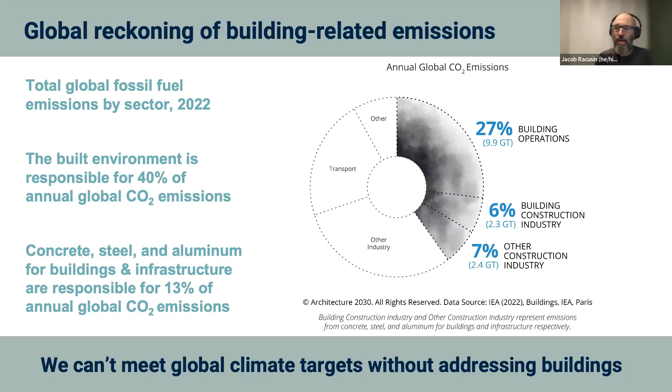I want to highlight, there is so much we could talk about just on the operational side of things, and I'll talk about that a bit in broader context. But I'm really going to be focusing primarily on embodied carbon in general, and specifically material carbon emissions. If we're looking between building and infrastructure, concrete, steel, and aluminum alone are responsible for 13% of global emissions. Highlighting those three materials within the context of how our buildings are produced, that's a huge volume of emissions that we've got agency in addressing through our design practices. So that's what we're going to be honing in on for the course of this conversation.

Just to put operational efficiency in context for climate action, I come from an energy background, energy modeling, energy management background. For many years, it was all about energy efficiency and reducing energy intensity of our buildings as the primary mechanism for addressing climate change. I want to start by saying, absolutely critical, still very true, and all of the efforts we do to draw down the energy loads of our buildings are fundamentally important towards hitting climate action goals for our industry. Unfortunately, they're insufficient alone. We need to do more than just make our buildings more efficient. Necessary but insufficient would be the way I would describe that.

Just to give a little context, Builders for Climate Action, in addition to developing the BEAM tool, does a lot of research on topics of material carbon emissions, and we've been involved in a whole series of benchmarking studies in various municipalities. So I know you're not all necessarily working in low-rise residential, but it presents some really good simplified case studies. We're going to give some data points to quantify and scale the impacts of emissions, just to put the embodied carbon, the material carbon emissions, in context of why this is important and how this can get woven into your practice.

So looking at an average two-story home, we see that every year it's releasing close to 3 tons of emissions. Over the course of time, those emissions on an annual basis continue to add up as we dramatically increase efficiency and reduce the operational loads. That has the effect, in many cases, of reducing the carbon emissions from the operation of this building.

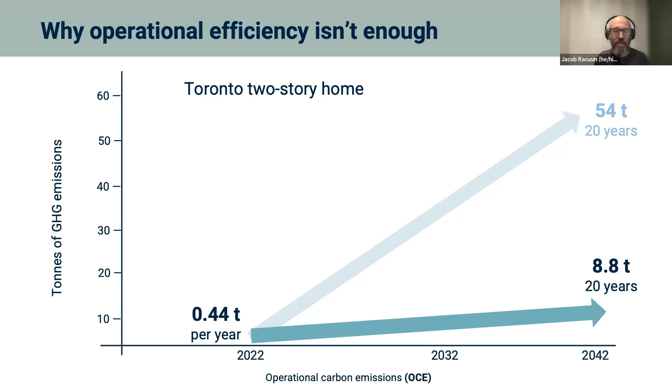So we see that line being much lower—there's much less added to the atmosphere on an annual basis for a much more efficient building. But we don't necessarily know the real climate impact of that build if we're only starting at operation and not looking at the upfront emissions from materials and construction practice to get that building into form in the first place. Whereas those previous graphs were showing lines starting at a zero mark, that's actually not accurate. They're starting with some carbon footprint entering into the life cycle, and that's the other part of the equation.

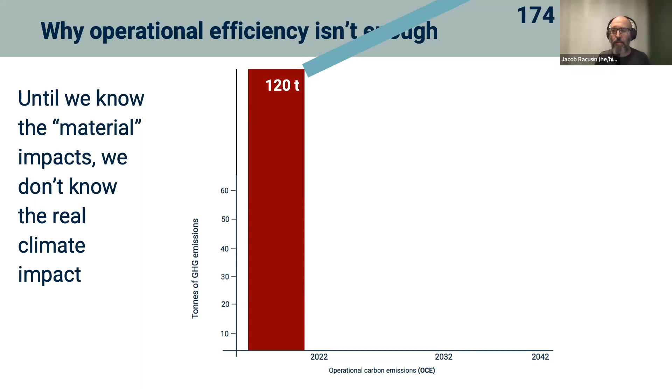Looking at results from benchmarking work we've done on existing, as-built buildings—this isn't hypothetical—the worst case scenario of some carbon intensive buildings radically dwarfs the operational profile of a really low load building. And when you couple that with an inefficient build, we have blown our carbon budget radically.

Average upfront material emission profiles start us at about 50 tons, and then there's an average incremental operational load into the future on top of that. It's really not until we combine low load, high performance operational buildings with low embodied carbon construction practices that we can actually get towards real net zero construction and net zero buildings—meaning net zero carbon and decarbonizing the building industry.

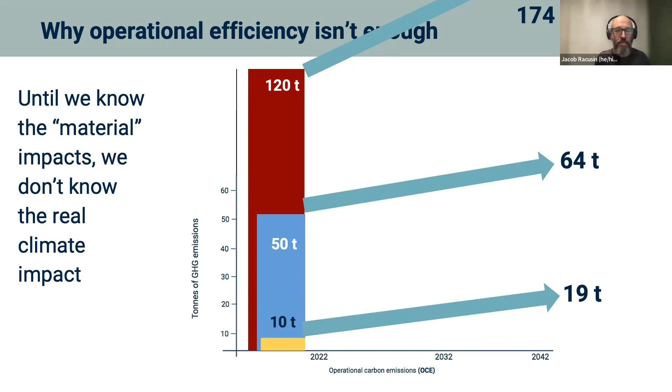Until we really understand the material side of things, we don't actually know the full carbon impact of our projects and whether we're going to hit our decarbonization goals for our industry by the middle of the century. Looking at that another way, with a different data set, but the same sort of blending of operational and embodied emissions.

When we look at various combinations of higher embodied carbon with lower operational, or vice versa—these mixed conditions in the middle—we see they're kind of hovering on either side of average. It's really not until we're reducing our impact in both of those categories that we actually get towards a true low carbon build.

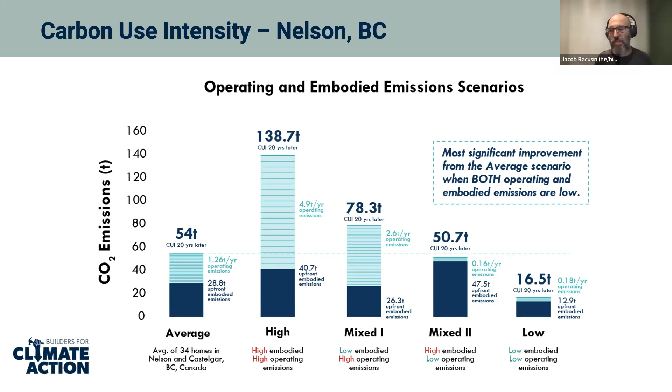That's really the fundamental justification as to why we have to expand our field of accounting, our field of view, and recognize the impact we're having from the material selections we're making—to really be able to hit the carbon goals and go beyond just addressing energy efficiency as the only mechanism for addressing the climate impact of our work.

I'm a big fan of goal setting in projects and establishing really good goals and good metrics to achieve those good outcomes. I see in a lot of projects I work on, particularly as a consultant, that energy use intensity—the operational energy of a building—is what's used as the primary goal for addressing climate impact. And again, absolutely necessary, super, super important.

What we saw from these other graphs is you can't get a zero carbon building if you're not managing your energy loads really well. But it's just not enough to stop there—in addition to looking at energy intensity, that energy really does need to be converted into carbon emissions. That involves looking at the energy source emissions and what is providing that energy and its carbon impact.

As we're moving towards electrification, we're learning a lot more about how just looking at that on an annualized basis isn't enough—we actually need to look at the time of use of the emissions and the different emissions profiles that come from the peak loading on an electrical grid. So there's a whole lot there that needs to get unpacked, a little bit beyond the scope of what we have time to talk about today.

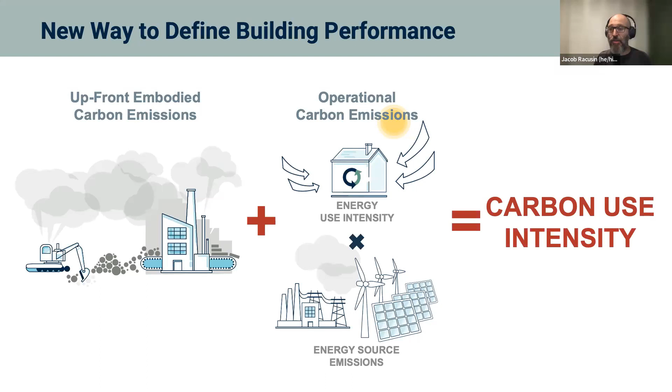But as we're setting goals and priorities for our projects, if the goal is really around climate impact, we shouldn't just set energy targets—we should set carbon targets, not only within the energy and operational side of the equation, but also adding upfront carbon emissions to get a metric, say, of carbon use intensity, if you were to blend those together, or at least recognize that both need to be held within the goals and metrics of success developed for a given project.

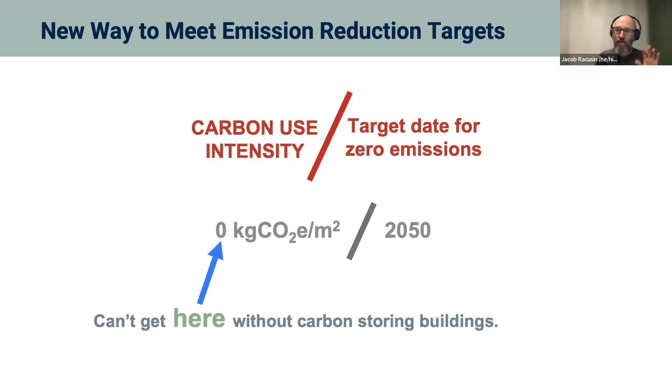Ultimately, what we're learning from the IPCC is that we need to get to zero carbon industry by the middle of the century. We have to address it across the life cycle of the building, and we're simply not going to get to zero unless we also hold and value the role of carbon storage within buildings, because we're still going to need glass and cement and concrete and other emission-related materials in our projects. So we have to find a way of balancing that equation to actually get to a zero point. We'll talk a little bit about carbon storage too. That's the bigger picture accounting I want to hold for us as we look at a more specific dive into the material carbon emission side of this equation.

I want to give a little bit of definitions and terminology and explain some of the letter jumbles you'll see on the screen. When I use carbon and carbon emissions, that's really shorthand for carbon dioxide equivalents. Those are the units we're measuring when talking about the global warming potential, or the contribution to climate change from the emissions of our materials and building operations. The little 'e' at the end of CO2 means it's not just looking at carbon dioxide, but blending all the different greenhouse gases and converting them to their equivalent value of impact as per a molecule of carbon dioxide.

An example of that would be methane. Methane is definitely released through the production of materials, as well as natural gas that may be used on site. Methane over a 100-year period has about 34 times the impact of a molecule of carbon dioxide. It's actually closer to 80 within a 20-year period. Nitrous oxide is significantly higher. We get into R410A and some of the refrigerants, and those can be thousands of times the impact. In the case of methane, the value would be 34 kilograms of CO2.

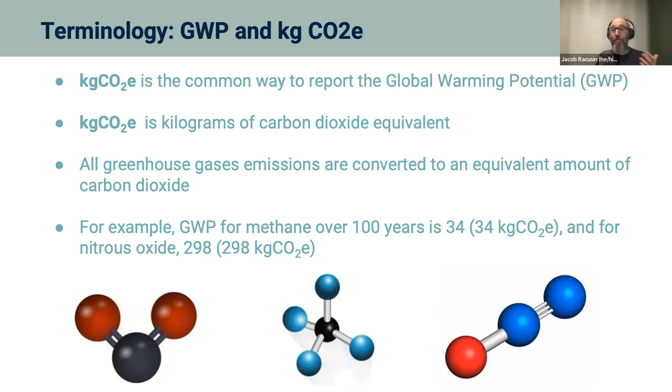Whenever you see that little 'e', it means we're talking about all the greenhouse gases contributing to climate impact. When I talk about carbon from the standpoint of carbon storage in a bio-based material, I'm literally talking about the element carbon in that material. When you see a carbon dioxide equivalent value from that, we've done the math to understand how much carbon dioxide has been photosynthesized out of the atmosphere and embodied into that material. So I'll try to be intentional with my language around carbon - sometimes I'm literally talking about carbon, sometimes carbon dioxide, and sometimes in the context of carbon emissions we're looking at CO2e for all the greenhouse gases.

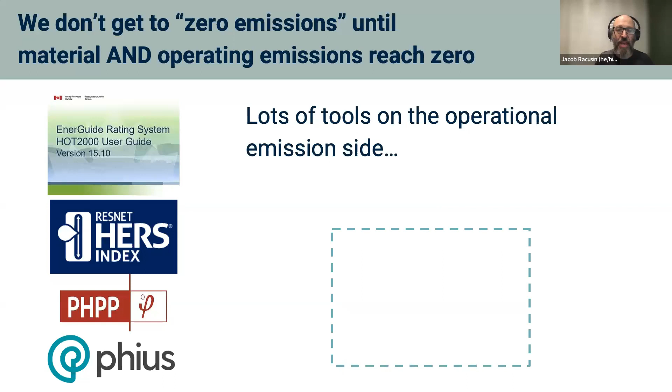Looking at this need to get to zero emissions across both the operational and material side of things, there are lots of really good tools, rating systems, and structures on the operational side, so I'm not going to talk about those - there's plenty of good resources for that. We developed BEAM to help address the material side of that, and there are other really good tools out there as well. I may draw up some references to those too, but the intention was to fill a hole in the tool sets to quantify and help manage the material emissions side of things.

To give a sense of scale as to why this felt really important to address, we looked at this from a global perspective at the beginning of the talk. We've done a lot of benchmarking of many homes and larger buildings, and in the context of homes we've recognized an average emission profile across our benchmarking studies of about 200 kilos per meter squared of building area. Multiply that by new low-rise residential construction - this was from 2017 numbers - and we get 50 million tons of annual emissions just from that one sector of the built environment. That's not even looking at more structurally intensive mid- and high-rise structures. That is equal to or greater than the entire national emissions of some major developed countries.

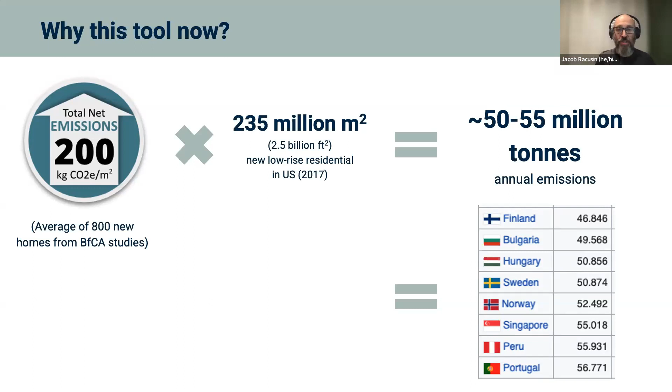So this is a really big deal. There's a lot of carbon, a lot of emissions that we have the opportunity to help manage and address - first by daylighting the accounting and scale of those emissions, and then using a tool, an analysis strategy, and a design process to help turn the dial on what materials we're selecting and how we can reduce that impact.

As I mentioned, there's a bunch of other really good tools out there. One thing I really love about being in the embodied carbon space is that it's a very open source, collaborative, all-in sort of community of practitioners and tool providers. Most of the tools that we had been working with when we were starting were really organized by and designed for practitioners of larger structures, which is wonderful.

That's obviously a very important place to intervene, but there was very little available to smaller firms working on smaller buildings. I've done plenty of work on mid-sized construction. A lot of the consulting work I do is in the 10 to 50,000 square foot building size, but not necessarily with in-house life cycle assessment experts, or working with BIM modeling tools that a lot of the other tool sets require. Particularly seeing that 95% of the buildings responsible for half of the emissions of our building sector in the country didn't have easy access to those tools.

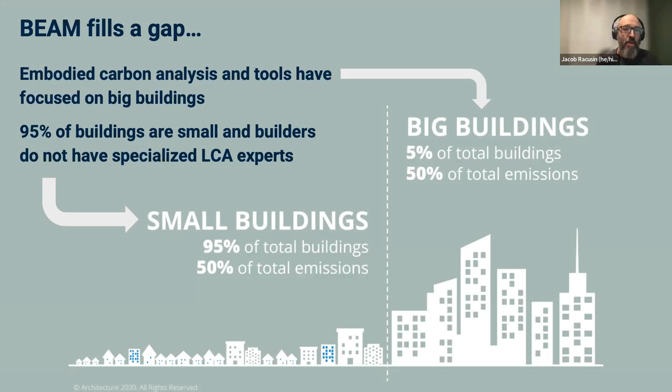We saw a need for a tool that was much simpler, more lightweight, easier to integrate both earlier into the design process and throughout the design process for smaller projects and smaller firms with smaller budgets. So that was the initial impetus of developing BEAM.

We've since used it for a lot of research. I mentioned I use it as well for larger projects, and through some of the research, it's been really illuminating as we've benchmarked existing housing stock in various communities to see what a broad range there is of the emissions profile, the material emissions profile of these different buildings.

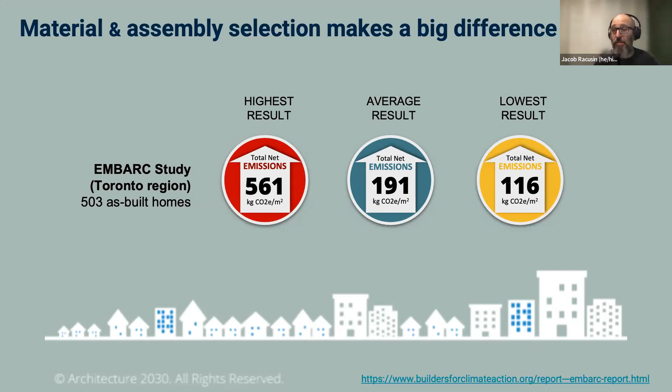Nearly or over a 4x difference from the lowest to the highest results, just looking at about 500 homes in the Toronto region. This gives a pretty good sense of not only what the span is, but how much opportunity there is to bend down the curve, taking some of those highest results to meet what's practical to build and has been built on the lower end of that spectrum.

What's also been really exciting to look at as we've been digging into the details of a lot of these case studies is that it doesn't necessarily require these big sweeping radical moves that have to fundamentally disrupt your base specifications or your design approach.

A lot of in this example here, we're showing you can get 75% reduction by a whole series of essentially simple substitutions of common materials. Taking a first bite by reducing the carbon intensity by adjusting the concrete mix formulation, another really big bite by replacing XPS and fiberglass and mineral wool with cellulose and bio-based insulation, and so on, changing out the continuous insulation, changing out the exterior cladding, and then just using best in category flooring and drywall selections.

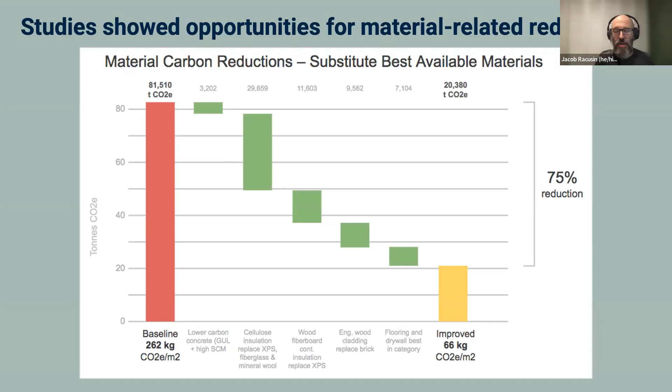None of these are radical, expensive, hard to implement solutions, but can result in a really significant reduction of those upfront carbon emissions. So just to bring into the conversation early, this can be done incrementally, in a series of steps, and you can make really large improvements without having to push immediately outside of a comfort zone in adjusting your preferred design practices and material selections.

So that was a really big goal for BEAM, to have a tool set developed that could be used for comparative analysis, particularly within the material profile or material part of the building's life cycle. So you can sort of see a layout of the tool. It's in a sort of spreadsheet format.

We have chosen to list out all the materials available for selection and list what their emission profile is, and be able to do direct side-by-side material comparison without even having to run reports or complete a full tool set or tool process. Just right out the gate, be able to start comparing and begin the analysis process.

I'll give some examples of how you can run everything from material comparison to assembly comparisons, working through some design development approaches as a design aid tool, as well as looking at whole buildings and whole material bill comparisons. Another thing that was really important for us in BEAM, I said earlier that it's really important to look at the realm of carbon storing materials as part of the solution set to get to zero carbon buildings.

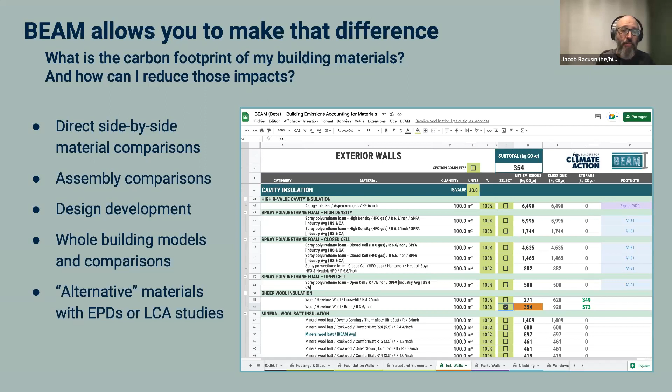So we, as the developers of the tool, come from a background of really leaning into bio-based materials as part of our material profile. We really made sure to go out of our way to include some of the alternative, less common, more innovative materials that are market available, market ready, and proven, but frequently missed in more conventional and basic material sets. If you're looking for cork, wood fiberboard, straw, ag residue materials, earthen forms of construction, we've gone out of our way to prioritize including those in the tool set because they're valuable solutions for our decarbonization strategies.

So I want to talk a little bit about life cycle here, both in the imperative of why looking at material emissions is important, as well as to explain what is included within the scope, the boundaries of the BEAM tool. So when we're really looking at the carbon emission profile of a building, we're looking at whole building life cycle assessment.

That life cycle begins with the extraction of raw materials out of the ground - that's mining for ore, extracting fossil fuels, or cutting down a tree. That would be the A1 raw material supply. Then it goes through a transportation process to get to a manufacturing facility where those raw materials are manufactured into products. That boundary, A1 to A3 in LCA parlance, is the cradle to gate, or factory gate boundary. That's what we call material carbon emissions, because we're comparing different materials and products as they're leaving the manufacturing facility.

There are additional steps prior to occupation - transporting those materials to the site, and then of course the construction process itself. Then we get into the use phase. Operations, the heating and cooling and lighting and powering of our buildings, is by far the biggest emission category within the use phase.

But there are also maintenance and repair issues that come up, and additional materials that are consumed, especially depending on the nature of the building and the longevity of the material. So that's another category of material consumption and emissions that happens.

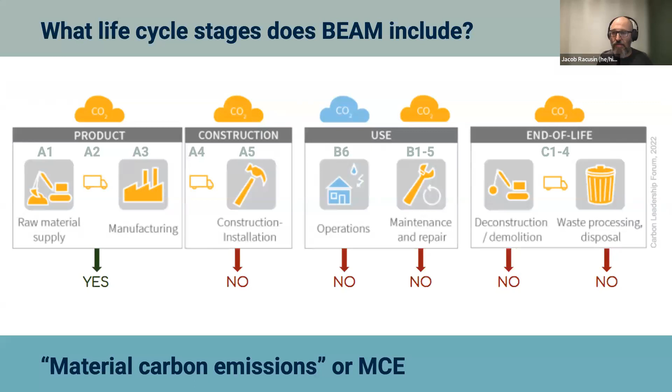So in the BEAM tool, we are very explicitly just looking at the material carbon emissions. This is not whole life cycle analysis. We are not looking at the full cradle to grave span of the material or the building's lifespan. We're just looking at the material carbon emissions.

And we do that for a few reasons. There's by no means a reason to say that's better. In fact, I would advocate for those that are really trying to understand and manage their carbon profile, it's really appropriate to look explicitly at the materials profile as well as at the whole life cycle. Looking at both those boundaries is quite relevant if you've got the bandwidth, the interest, and the capacity for that. We chose to really focus on the material carbon emissions for a few reasons.

One, we believe that the materials that are emitted today and prior to the occupancy of the building are some of the most important emissions to manage. For two reasons: one, if we're trying to hit near-term emission reduction goals, then we need to reduce the emissions that are being produced today.

While I'm a diehard advocate of low load and low energy buildings, electrified and renewably powered buildings, those emissions are released annually, incrementally over an 80, 100, 150-year lifespan of a building. We don't really have that period of time to realize our reductions. We need to be realizing those reductions immediately. The phase of time in which those emissions are released are prior to occupancy of the buildings that we are designing today. So it's very important to be looking at those emissions.

Those are also the emissions that persist for the longest period of time over the lifespan of the building. The fact that they're released early and persist long also heightens the value of really addressing that plume of emissions. Another reason we're really focusing on that is because the majority of the emissions - this very much depends on the material and on the building type - but in our experience, we found that the majority of the emissions in a building's lifespan are really released during that material development process, in that cradle to gate.

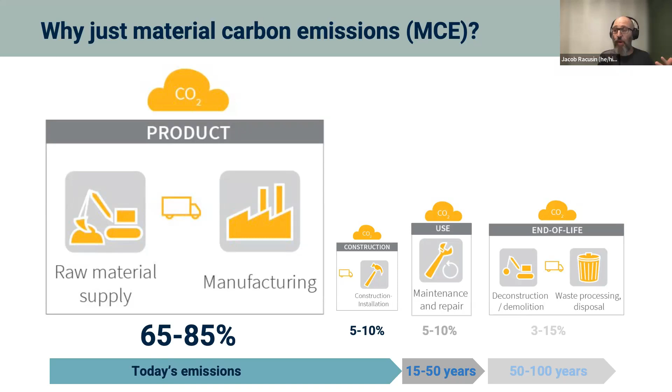That felt relevant to really focus on that larger package or plume of emissions, as well as that's the best quality data that we had, the least speculative and most comparable data, coming from EPD sourcing—environmental product declarations—which is the data set we're using for these various products. That's the highest quality data set. So while we're trying to create an easy to use, simple to understand, quick to deploy tool, focusing in on that boundary made the most sense, knowing there are also really high quality life cycle assessment tools available for looking at the full life cycle of the building.

I encourage you all to download it and start playing with it. And if you find it of value, please consider contributing to the use of the tool, because this is a community-funded project to keep improving upon it. I'll talk about a new release coming out with some improvements at the end of the show. But just to give you a really quick walkthrough of the tool, so you have a general sense of what it feels like and what it looks like.

Again, it's a spreadsheet format, so those of you with some acumen with spreadsheets, this will all look very familiar. We really designed this to be a very simplified, low input tool. So any of you that have done box model energy models, where you're just putting in some general assembly dimensions, that's a very similar analog here, where we're asking for some basic inputs of some of the major parts of the building.

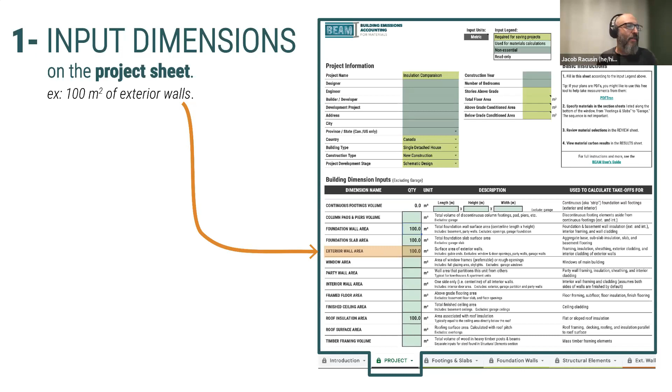Then there's a whole series of different tabs you can see at the bottom here that capture each of those different assemblies in the building and gets into much greater detail. So within any one of those assembly tabs, in this case looking at exterior walls, you'll see there may be some additional inputs. In this case, you need to input the R value of your insulation to be able to get some readings back. That's the input basis that you are comparing your different insulations against.

And then when you say, okay, I'm going to select wool—loose fill wool is my insulation of choice—you simply click the checkbox. This highlights the selection so that you know that's been selected, and it adds it to a subtotal at the top of the page, as well as to the summary pages at the end of the tool, which we'll get to in a moment. So that's as simple as clicking and unclicking a box to select and deselect materials, which also helps as a design aid. You don't have to run through the entire iteration of the tool and get results and then repeat—you can make a bunch of modifications and selections in real time as you're navigating through the tool.

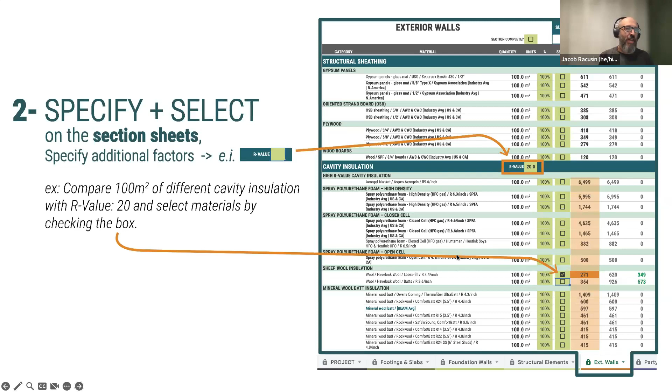And again, as I mentioned before, all of the comparative analysis of the different materials for a given R value are revealed just in looking through the different entries of the different materials, which can be really useful for getting a sense of scale of impact of choosing material selection A versus material selection B. There are 12 assembly sheets total that you would navigate through to select the materials that you need for any one of those assemblies, and there are some additional input factors specific to the different parts of the assembly—we talked about R value.

That would also include framing spacing for stud or metal framing, your wall thickness, for example, for your concrete wall, so on and so forth. So some of those additional inputs will show up as required throughout those assembly pages.

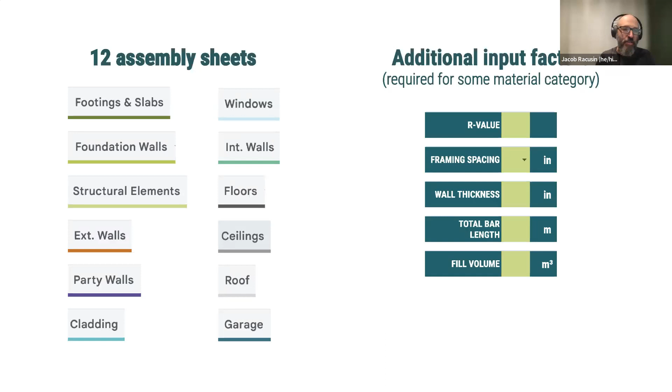Once all of those have been filled out, or as many as you so choose, you do not have to fill all of them out. We'll talk about some different approaches of how you can conduct analysis here.

The amount of biogenic carbon that has been stored that we deem meritorious of carbon storage - we do not account for virgin wood as a carbon storing material because of the complexity and lack of transparency in wood supply chains. However, we do include wood and agricultural residues and bio-based recycled materials like post-consumer insulations, paper insulations like cellulose, as qualifying for carbon storage.

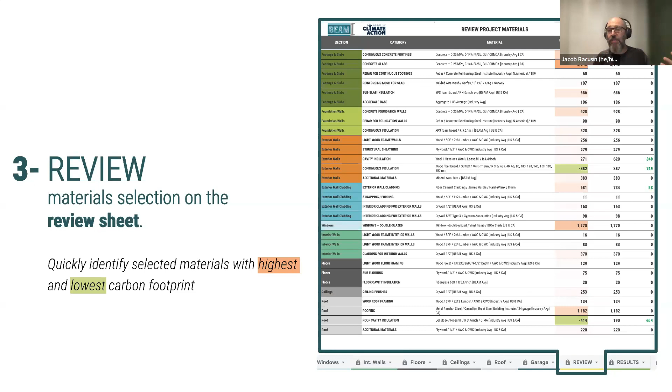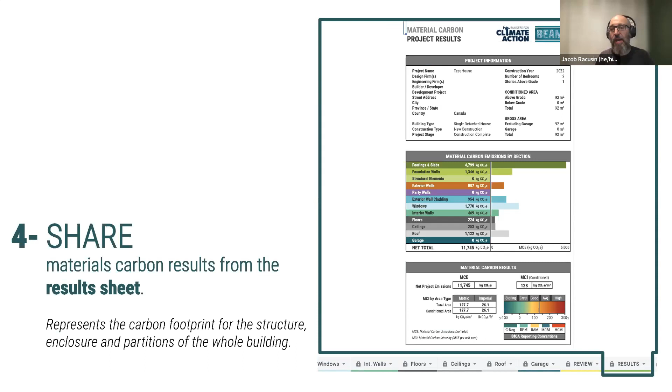And then there's a results page, and we'll walk through the different components of the results page formatted to an 8.5 by 11 format, so it can be printed out or burned into a PDF to be able to share with the rest of your team, communicate the results to a broader audience.

Part of what we have done in tricking out the Google Sheet, we've done some custom scripting. When you first load up BEAM, you'll be taken through a series of menus to accept and approve custom scripting. We promise we have not embedded any malware or harmful coding into this tool, we promise.

But we have a custom menu here that allows you to save your projects and reload them and compare different versions of those projects, as well as toggling between metric and imperial.

This tool was developed by a Canadian group, and so you'll see there's a lot of metric information here. Don't panic. You can both convert from metric to imperial, as well as just toggle the units. If you entered everything as an imperial value but didn't realize that the metric was what was selected, you can just change the unit description as well.

So a bunch of different customized features that allow a professional to be able to load multiple different projects and multiple different versions of a project to do comparisons between different alternates, or a baseline versus an improved comparison.

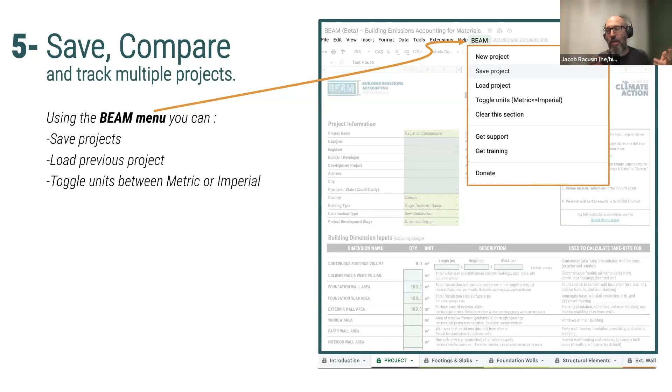Looking at the reports page with a little more detail, we have a few different sections. The first section there, which is not highlighted, is just some of the same basic building information that you have entered in the beginning: the name, the location of the project, who some of the project partners are, some square footage information, so on and so forth.

We have a breakdown of the material carbon emissions by each of those sections of those assembly tabs, so you can see how the disbursement of carbon emissions for your project breaks down by those assemblies.

In this case, we can see that the footings, slabs and foundation walls hold a lion's share of the emissions, as well as the garage. So in this tool, we've included a section for adding a garage or another outbuilding or porches, or some other additional structure outside the primary building, that you can add into the tool.

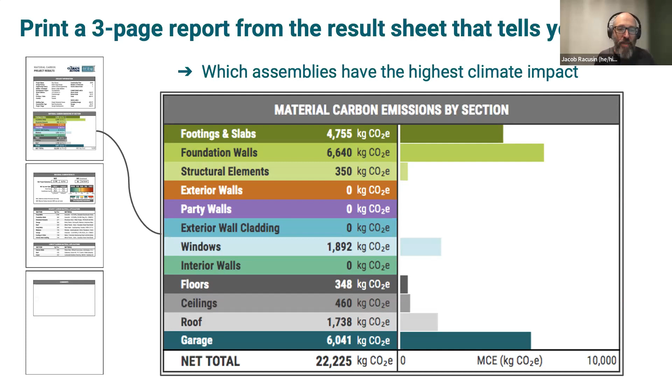The square footage of that structure is not included. You can do an analysis based on carbon intensity, which is on a per conditioned square foot basis. In this case, there's a lot of emissions from the garage, but no one is living in it, so that gets burdened onto the project as part of total emissions, but there's no credit leverage for additional habitable space.

So we can look at this on a per assembly basis, and also at totals - what the net emissions are for the project, as well as material carbon intensity, on a per square meter or per square foot basis. In creating a tool set that works for both metric and imperial markets, we've got intensity broken into both, for total area as well as conditioned area.

If you go back to that initial project entry form, you can enter both the total area, which includes unconditioned area for the building, as well as just the conditioned area, depending on how you're choosing to run your analysis.

We also have a scale based on our benchmarking of how good or bad a number is. We recognize we're still early in the process of getting a good sense of what constitutes a good or bad value for material carbon emissions, so we've provided some scalar inputs there.

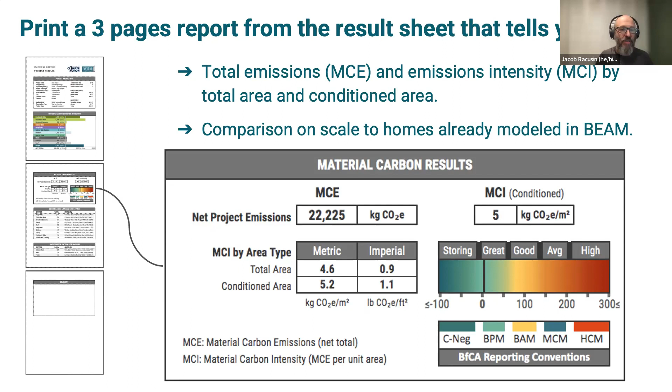I'll note, and get more into this at the end, we've done a lot of work to revamp and improve the legibility and additional information in this reporting, particularly in this view, in the next version of the tool, which is coming out by the end of this quarter. So look for that as you continue to download and work with the tools.

We also break out some of the highest carbon material applications. If you're really trying to use this as an iterative design tool, and not just a reporting tool, this will quickly lay out where all the carbon is, not just on a per assembly basis, but on a per material basis.

In this case, we're seeing that the walls and the slabs really jump out. The garage is a full category - it's held as an entire entry, so on and so forth. And it's not highlighted, but the best material storing applications are also listed as well.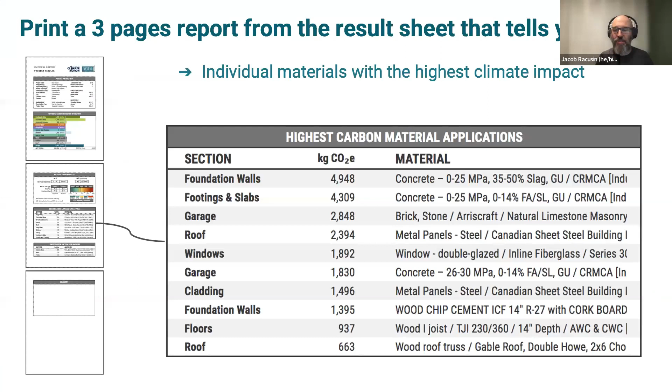Just to move us along here, let me give some examples from an analysis basis of how you might use the tools and different types of analysis with the BEAM tool. One is just looking at a simple material swap.

Here we've got two basic, very simple wall assemblies listed, and within the section of exterior walls, we've got some framing, sheathing, cavity insulation, and continuous insulation listed. We wanted to do a sensitivity analysis of how big a deal it would be if we were to swap out an average mineral batt product for an average dense packed cellulose product.

You can see both on the line item and on the subtotal for the assembly, wow, that makes a really big difference. Clearly there's significant value from carbon reduction in making that simple material swap. You don't have to input anything more than that - it'd be quite reasonable to just put in 100 square feet or 100 square meters for that assembly, run this analysis, and consider that a successful use of the tool.

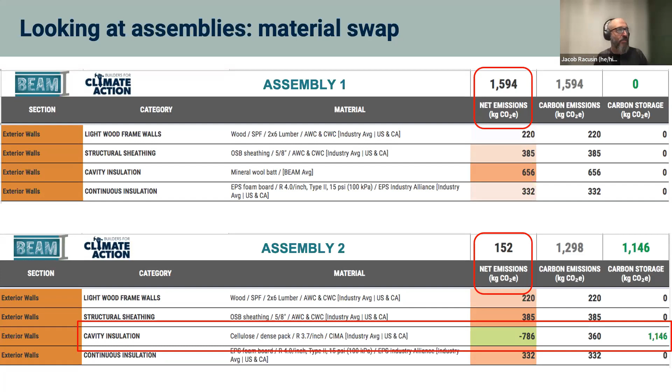You can also use it to compare different assemblies to each other. This would be, okay, well maybe we'll do this as a stud wall construction, or maybe as insulated concrete form, or maybe as a structurally insulated panel.

What's the diversity of carbon impact for a few of these different assembly types? That gives another way of using the tool, zooming out, not just for a material swap within an assembly, but comparing different assemblies to each other.

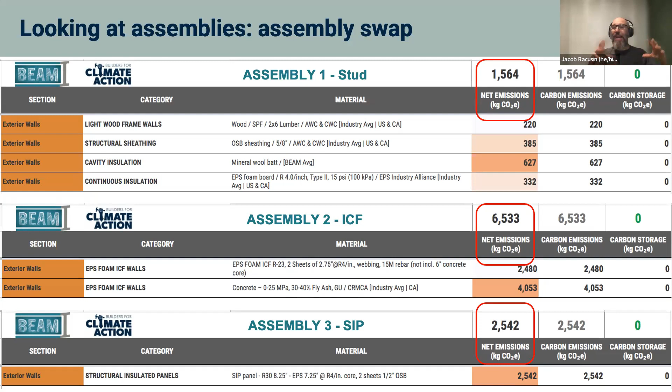There's a few different ways you could organize that, saving some different types or alternates of the project to be able to recall those at any moment. So that's yet another way of zooming out a level of analysis.

You can also expand that, not just to the core services of structure, insulation, and enclosure, but also add some finishes. You may choose different finishes based on your assembly type. So this moves outside of only the exterior wall section to include the claddings, zooming out a bit broader in the boundaries of our material analysis.

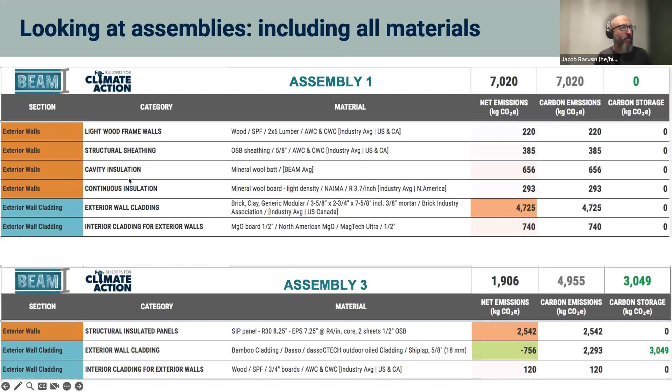And then, of course, you can zoom all the way out and look at a whole bill of materials for a project. In this case, we're looking at a pretty significant reduction, 75% between these two projects. The analysis work would then be to look on a line item basis and really see what changes lead to that cumulative reduction of emissions across the whole building.

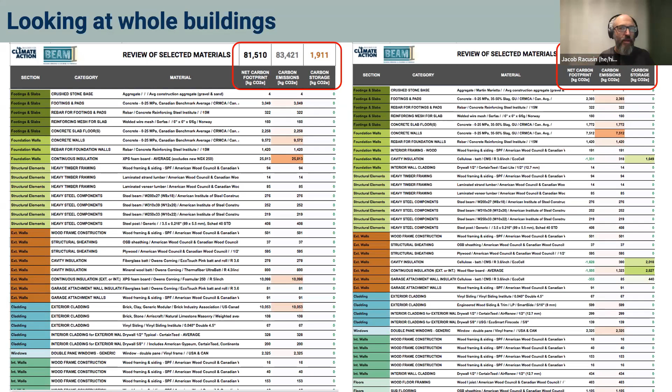So just giving you a few different scales of an analysis boundary that you can use the tool for, depending on what your needs are in the design process.

I'm excited to share that the tool launched initially, geez, I think about a year and a half ago, if my memory serves. So it's been out in the world a little over a year, maybe not quite a year and a half. We've seen a whole lot of uptake from it, and gotten a lot of really good feedback.

So we have a series of improvements that our team is actively implementing into a revised version. A whole bunch of new EPDs and updates - EPDs are environmental product declarations, which is the data backend to the tool.

We've improved the scripting to make the saving and loading a bit faster, and make it easier to do comparisons, since you can save different versions of the tool. We've improved the ability to compare across different designs, and the ability to add your own EPD.

If there's a product that you found some data for that you don't currently see in the tool, you have the ability to import that yourself, as well as pop-up notes and the ability to make notes and sketches for your own organization within the tool.

We have expanded the menu for custom concrete EPDs, because those mixed formulations can be very specific, and there are now tools out there to do custom digital EPDs for concrete. So we've brought some of that functionality into the tool.

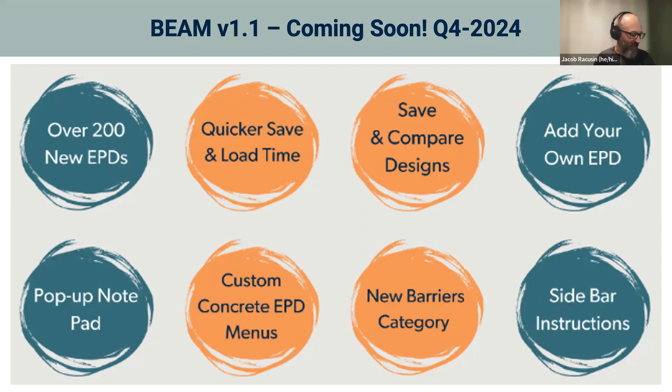I would say you shouldn't wait for that to come out - go ahead, download the tool, start working with it now, but just know there'll be more good things to come.

So again, we encourage you to give it a spin. I find it's a really quick and easy tool to learn. The learning curve is pretty gentle, I would say, particularly if you have some experience working with spreadsheet tools.